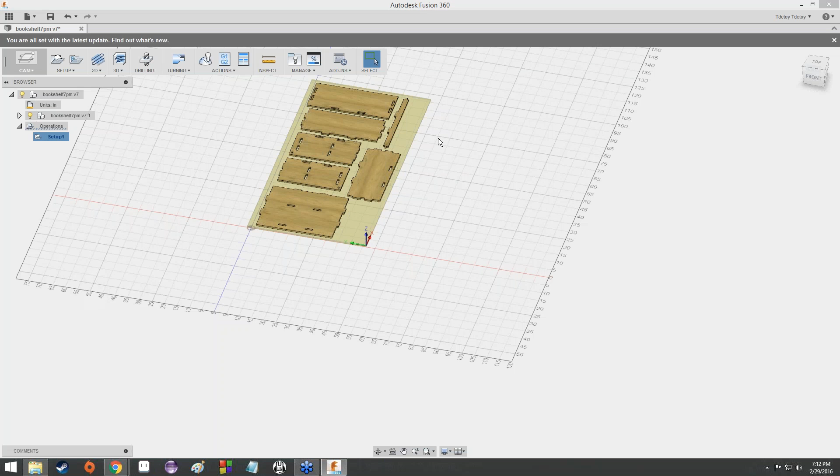Oh, it'd probably help if I didn't have the screen paused. I apologize. Yes. This is, yes. I am in the program. Thank you for pointing that out, Aiden. I apologize, everybody.

So, to recap, this is our setup, 48 by 96, thickness of ply. And you can switch modes by this upper left-hand menu right here from model to CAM. A setup is necessary, again, to simulate the conditions under which the CNC machine will be working. You can actually create G-code, that is to say the instructions for the machine to cut things out, with each individual setup. So you can create different setups for different tools under the same machine.

So you can run a setup program, then the machine will finish, you switch out the cutter on it, and then you run the next setup program. And maybe you run 2 or 3, and then you have your final product. This one's only going to be 1. It's going to be nice and straightforward and easy because we're going to be using the same cutter and the same feed rate and RPM and all that good stuff. So that's all going to be standard across the board here. So we can keep this all within the same setup.

Excuse me. I apologize. I had to drink some water and have a coughing fit. The advantages of being sick. Anyway,

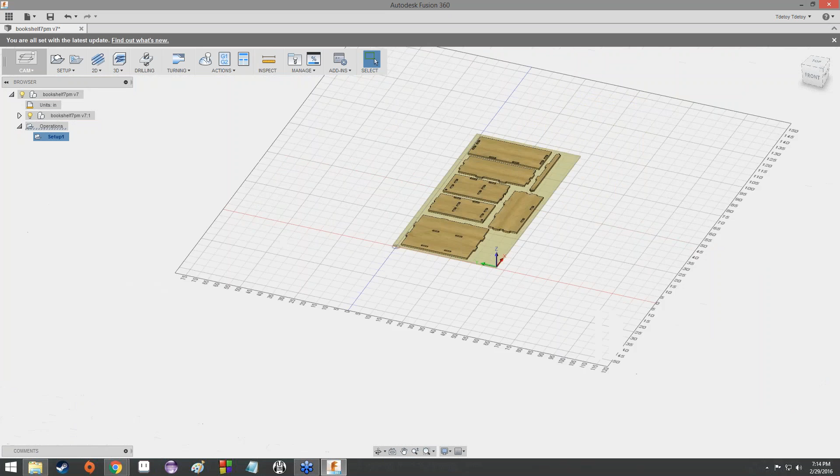Yes, like I said, we had our axis down here, Y along the 48 side, X along the 96 side, and Z pointing straight up. And it was down here in, I guess, the lower right-hand corner, depending upon your perspective. Anyway, that corner over there. Along the x-axis. As you can see, here's the x-axis, there's the origin.

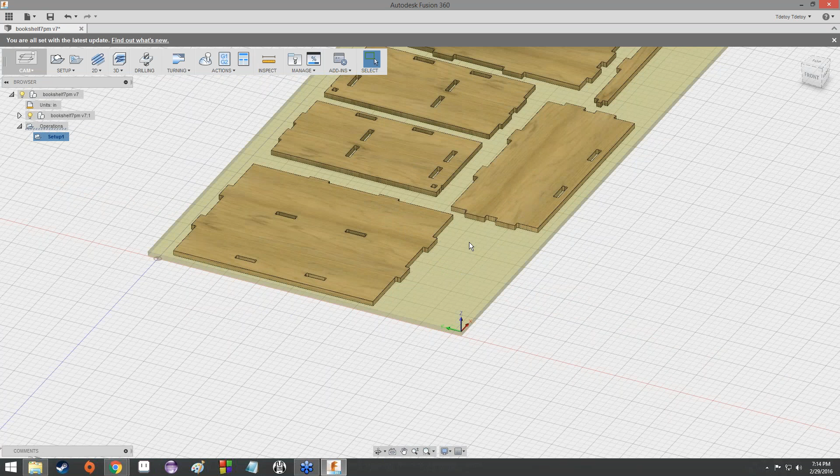So, now that we've created that setup, we're going to go ahead and start making our first cuts. There are going to be 3 sets of cuts for this particular design, and that's it. So we're going to do 3 different cut commands, all with more or less the same options, and then it will be ready to go.

So the first thing we're going to do is we're going to go up here to 2D, click the little drop-down menu, and we're going to go to 2D Pocket. If you mouse over it, it's got this weird kind of doodad that's got all the blue lines and the green lines and the yellow lines in it. Go ahead and click that one.

So this is the first thing you're going to see anytime you go into a cut menu. It's going to be the Tool tab. Now the Tool tab is where you, as one might assume, select a tool, as well as the parameters that the tool is going to be working on. So we're going to select, actually it's up here, perfect.

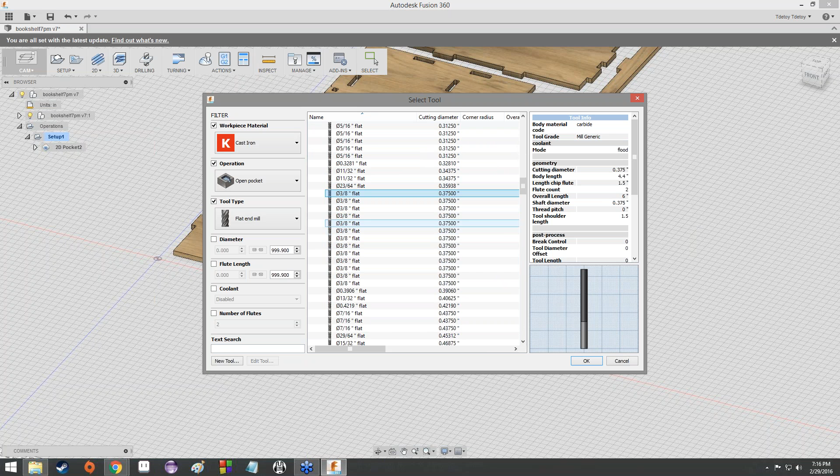For you guys at home, maybe you have one up here that's a 3/8 inch tool. Maybe you don't. If you don't, that's fine. You can just scroll down and find a 3/8 inch tool. You'll notice that there are a whole bunch of different options for a 3/8 inch. The one I selected, well, why don't I go up and look at that one? About 1/3 of it was the light gray and 2/3 of it was the dark gray.

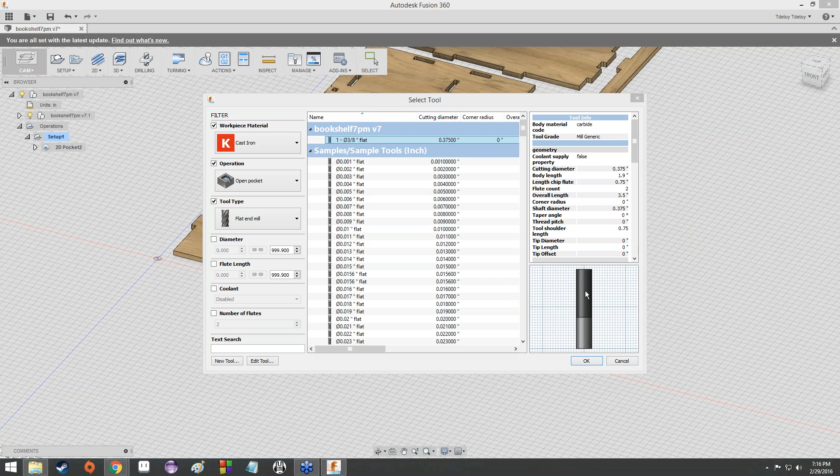They all really essentially have identical properties. I apologize for clearing my throat on a hot mic. But just for consistency's sake, if you can find one that looks like this one, select that one, and then we'll continue with that one. And just raise your hand once you've got that tool selected, because there's a lot of sifting through the tool parts list in order to find the proper one.

Okay, we got a couple of hands up. We had 4 hands. Now we have 3. Now we have 4. We did have 5. Okay, cool. That's more or less everybody.

All right. So now that we've got that selected, we've got the tool. It's the number 1 3/8 inch diameter flat. That's what that circle with the cross through means. It means diameter. Real straightforward. It's just a shorthand for it. Now we're gonna change a couple of the parameters here. So under spindle speed, notice it's 3,676.02 revolutions per minute. We're going to change that to a nice round 10,500.

It should automatically change the ramp spindle speed, which is perfect. And the surface speed will automatically update, as well as the feed per tooth and the feed per revolution. All that stuff will automatically update. We're going to change a few more things, though. Cutting feed rate, just go ahead and type in 60. It will automatically update to inches per minute, which is perfect, exactly what we want.

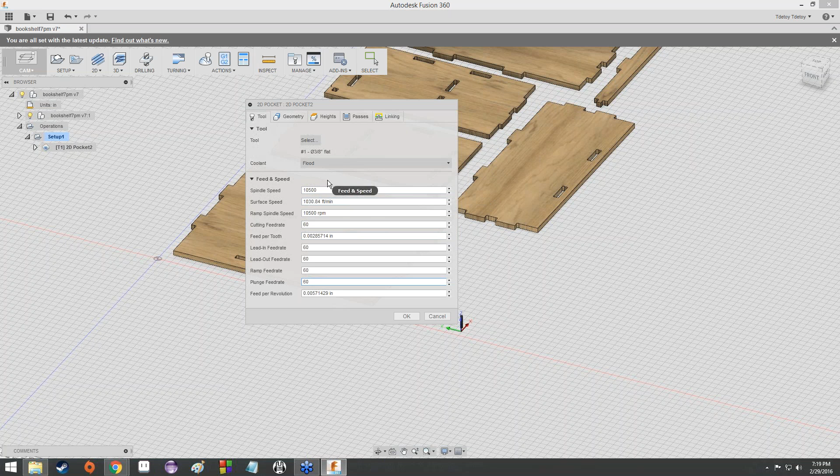But once you've got that done, if Fusion is working properly, that will be the last time you'll have to do that for basically the rest of this model. It will automatically set these options to these values and set the tool to the one that we picked every time we do a new set of cuts on this.

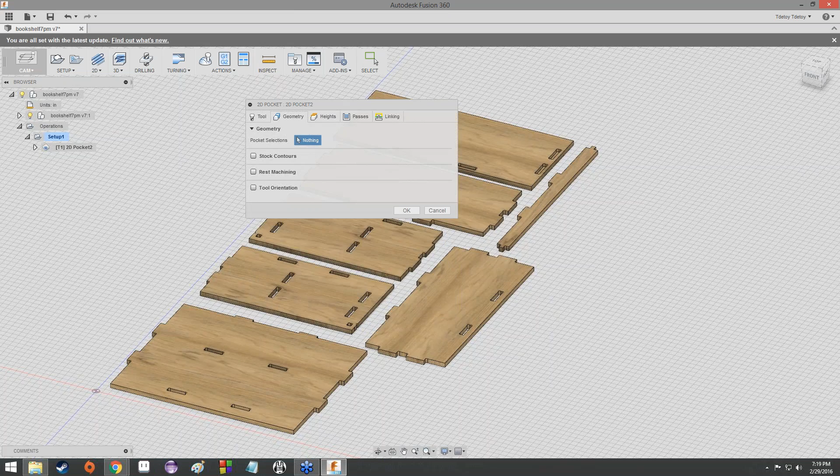So with tool done, at the tabs along the top, we're going to go ahead and select geometry. Now, geometry is just a really fancy way of saying what stuff you want to cut. I mean, really. So when we're talking about pocket selections and all that stuff, it just means what holes are you going to cut? In this case, we are going to cut all of these blind tabs along the top.

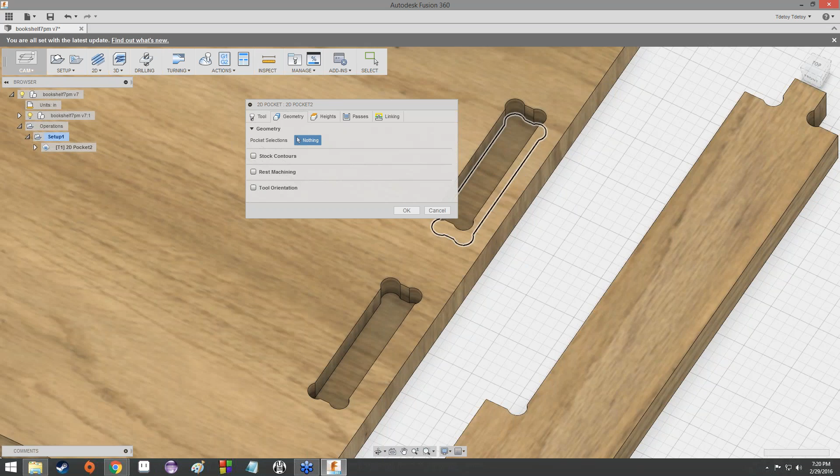And the way that's done is you would think you would just click on this bottom part and it would figure itself out. But for accuracy's sake, we're actually going to select the edge where the wall meets the bottom of the blind tab, or top, depending on what your perspective is. So, this lower dog bone here, go ahead and click that. It will think about things. And you notice how mine turned, like the entire thing turned blue. Not okay.

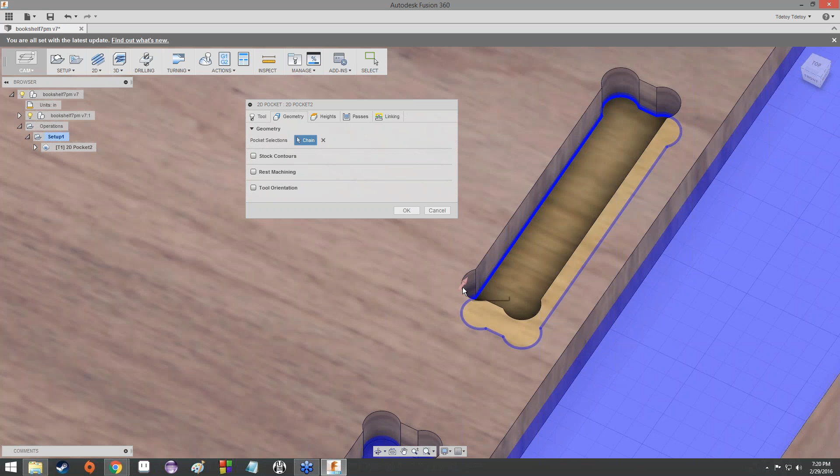Ideally, just the inside should be blue. So if the inside of yours is blue, fantastic. If it's not, you'll notice that there's this little red arrow right here, and it's on the outside of this dog bone contour. Just go ahead and click it, and it will flip around. So now it's on the inside, and just this inside area is blue. And that means that we've properly selected the inside of this pocket to be cut.

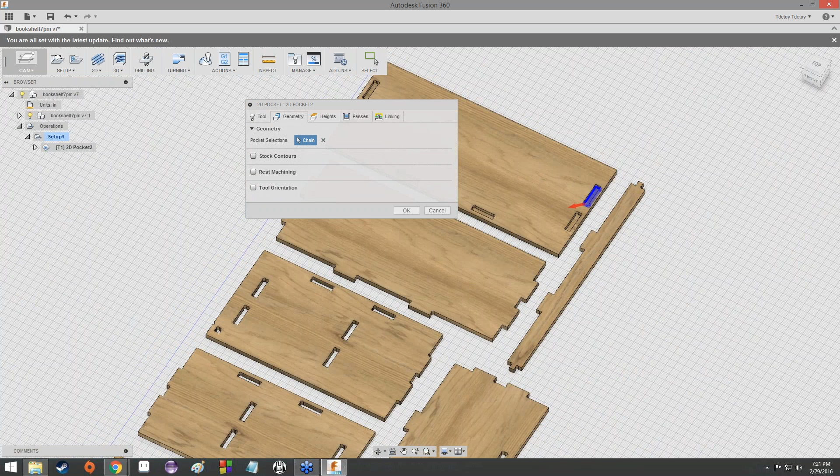Otherwise, it would cut everything around this dog bone right here. So the CNC machine would get started, and it would just cut everything over here and over here and over here, and you'd be left with a nice little dog bone shaped piece of wood. It's like those cartoons where they cut down an entire tree and then the whole thing gets whittled down to a single pencil. Or if you're thinking of The Simpsons, a single bowling pin. It's a bit wasteful, and that's not what we're looking to do.

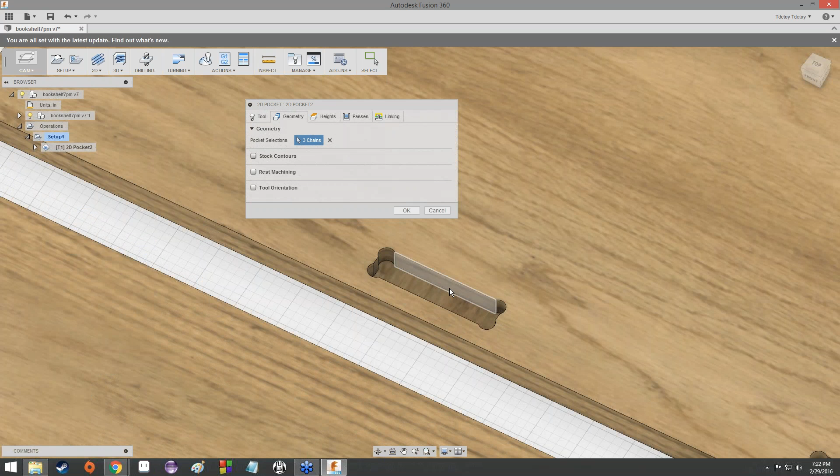So let's go ahead and do that with all of these. So again, you want to select the contour. And again, if it's selecting everything as blue, click the arrow, flip it to the inside. Contour. Sometimes it will automatically select the right thing. That's great. It just means you got lucky because it guesses, 50-50 chance. It guesses under the guise of being a smart interpretation, but just from my experience, it just randomly guesses the inside or the outside. So make sure to specify very explicitly that you just want these blind tabs cut out.

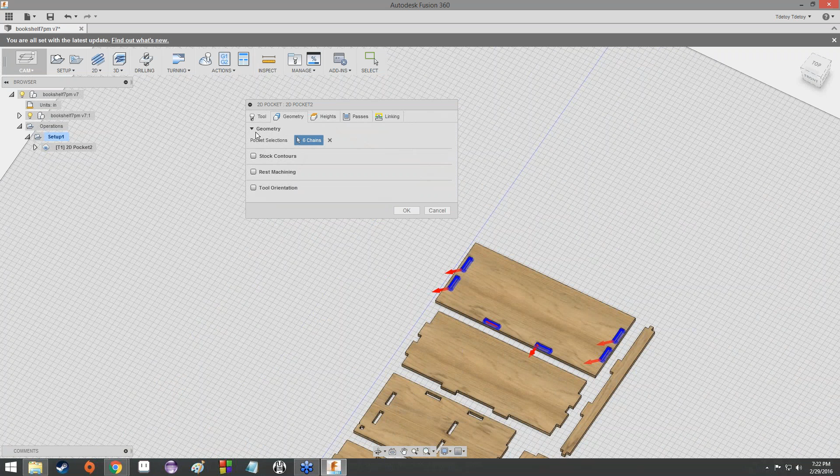So that's our geometry. Perfect. Heights is the next tab. We're going to leave that one alone. Pretty much never going to touch heights, at least not in this class. It's not going to be that often that you're going to touch heights in CNC machining in the future. I could be wrong, in which case I'm going to eat my words, but the number for the cutting feed rate is 60 inches per minute. You can just type in 60, and it will figure itself out.

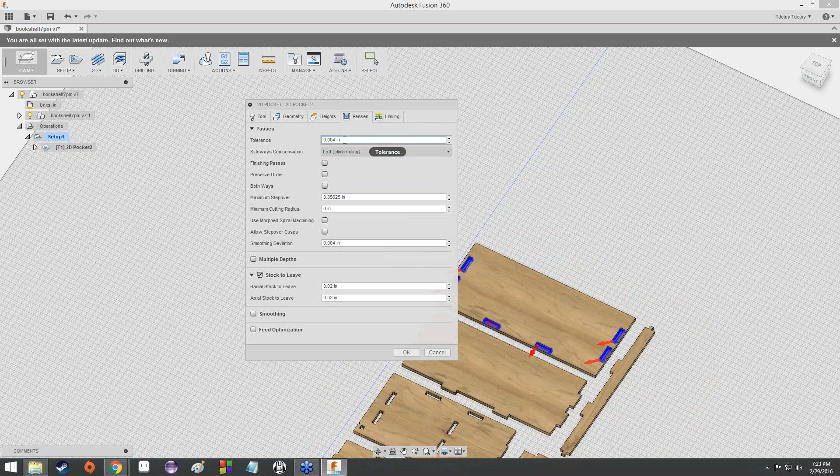No problem. Okay, so onto passes. Now passes is where we're going to start messing around with stuff again. Tolerance we're going to keep the same. Basically it just means how much error we can have in the cutting. Actually, here's a pretty good explanation right here. So if you're cutting something that's got an unusual curvature on it, like an ellipse or a spline. A spline is just basically a fancy name for a curved line.

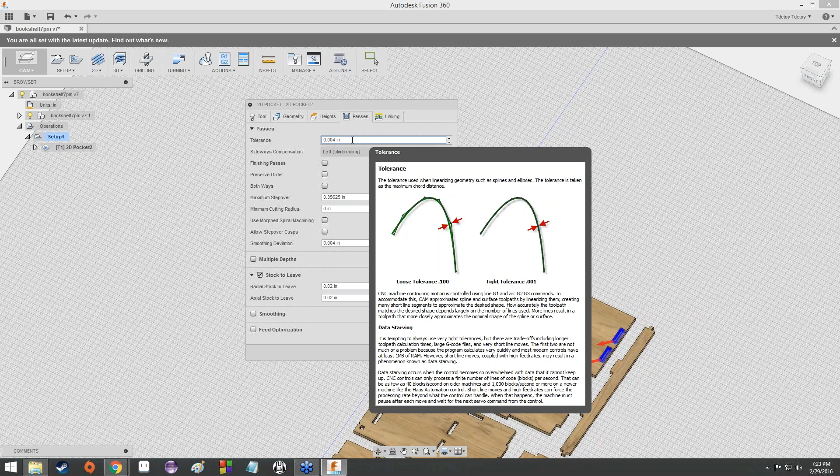If you have a very low tolerance, let's look top down at this dog bone. So these curves at the edges here. If we had a fairly low tolerance, we might see something like this straight line right here. Imagine that I can draw straight lines. Would look fine. And then you'd have a straight line that goes out to here, and then another straight line, and then another straight line, and so on and so forth. So it would look more like some sort of, I don't know, dodecahedron or something like that, rather than an actual circular piece of wood.

A very high tolerance means that it's going to be closer to an actual natural curved shape. So it's going to look closer to the model that you created. If you're not worried about accuracy, like if it doesn't have to be a curved line, then you can go with a pretty low tolerance. Why did it go back to heights? Okay, there we go. If you need accuracy, if you're not concerned about how long it's going to take to cut, then you go with a very high tolerance to ensure that you have as close to the model as possible.

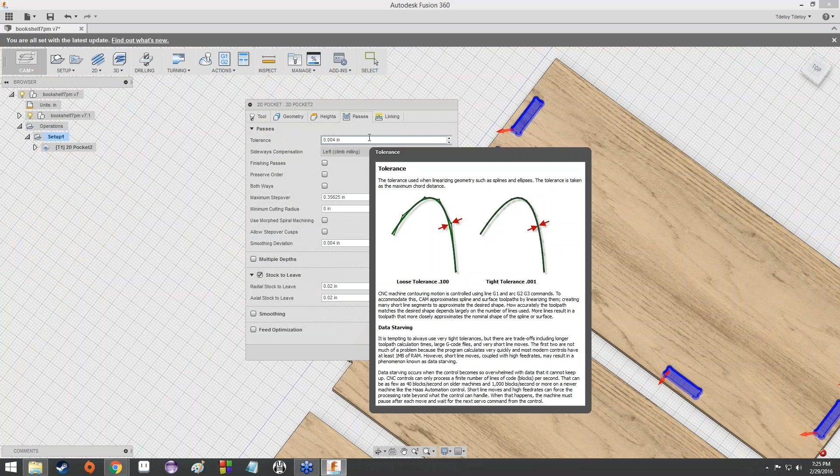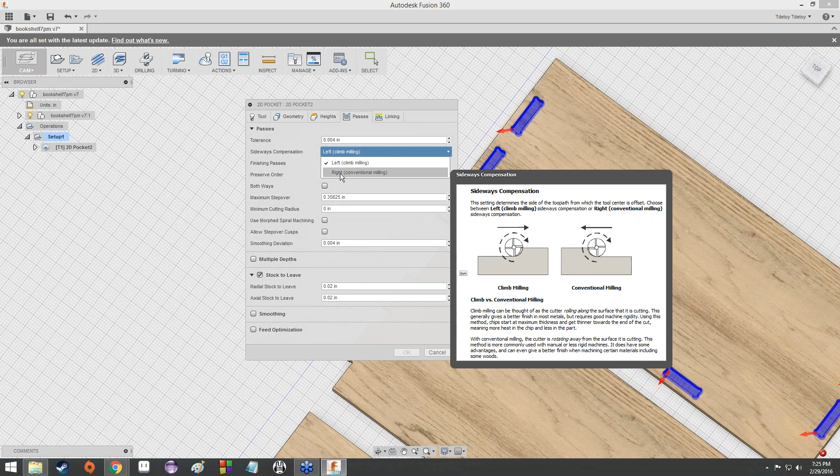Sideways compensation. Sideways compensation just refers to the direction that the mill moves. It's always going to spin the same speed, but it refers to the direction that the mill moves relative to its spinning. For these cuts here in this model, we're going to use conventional milling. So for each of our 3 cuts, it's going to be conventional milling.

Finishing passes preserve order both ways. Maximums, like the rest of the stuff in passes, you can just leave as is. So we can minimize it right now. Perfect.

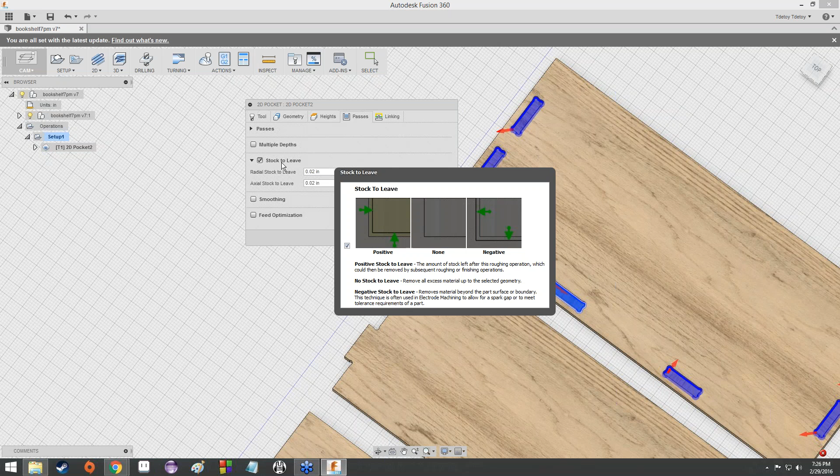Normally if you're cutting like a 3-dimensional design or something that is different from this, sometimes you might want to leave some stock behind. Basically, ensure that there's going to be a little bit left over in case something goes wrong. Or you can cut away a little bit further just to ensure that the design you're cutting is large enough. We're not going to leave any stock behind, so just go ahead and uncheck that.

However, we are going to check multiple depths. Now, multiple depths basically means the tool is going to take multiple passes at our cuts. So let's say it's cutting this pocket. It's going to go in once, a certain depth down, and then attack it again a little bit deeper, and then again a little bit deeper, and so on and so forth. Sort of cutting it away in degrees, as opposed to going as far down as it needs to, and then just throwing all the material out of there.

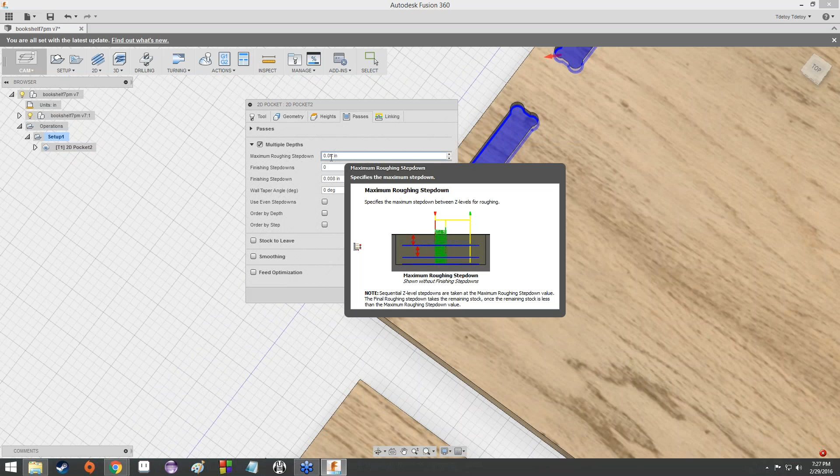Multiple depths kind of helps with keeping the material from breaking as much. It's easier on the tool, stuff like that. So we're going to go ahead and change the maximum roughing step down to 0.1875 inches. The relation to that is it's half the diameter of our cutting tool.

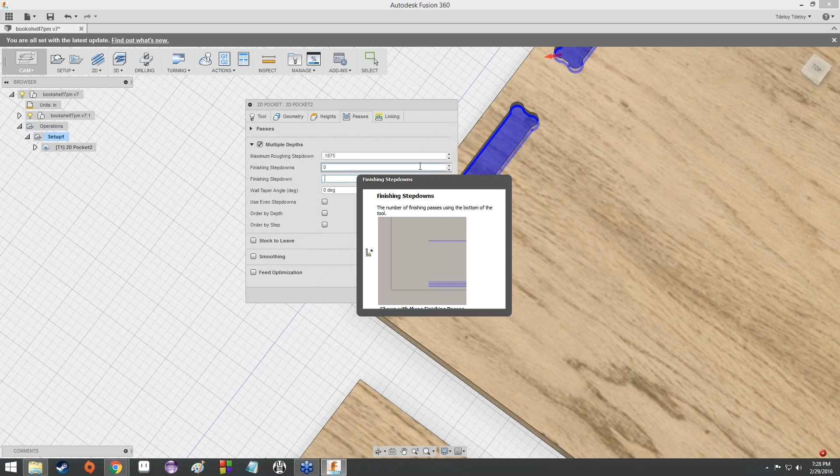But that's really it. It's not like it's gonna make a huge difference. It just gives us a nice value to step down with that's not going to be too crazy precise or anything like that. Same with the finishing step down, 0.1875. So now maximum roughing step down and finishing step down should both be set to 0.1875. When that's done, we can move on to linking.

Linking we're going to leave largely untouched except for ramp. Go ahead and expand ramp. Under ramp, you've got a whole bunch of different ramp types, and if you click this list and mouse over one of them, it's going to give you a nice little explanatory picture of each of these. The lines, by the way, are the path of the cutting material. Excuse me.

So as you can see, plunge is just going to head straight in and then start cutting. On zigzag, it's going to do a nice little cut back and forth in order to get down to the material that it's actually cutting. Profile is going to try and follow the shape of the cut once it actually gets down to the material. Smooth profile is going to be a nice little circle, and helix is more of a spring, like a spiral. Whereas smooth profile does some sort of weird wiggly stuff at the bottom. Anyway, we're going to do a plunge.

You might want to do something like helix or smooth profile on a stronger material, just to ensure that, again, you extend the life of the tool, make sure it lives as long as possible. Don't just slam it into some metal and start running it around with the metal screeching and blah, blah. It'd be terrible. With wood, though, you don't really have to worry about that so much. So you can just set it to a nice, simple plunge. It's just going to head straight down in there, cut around, done.

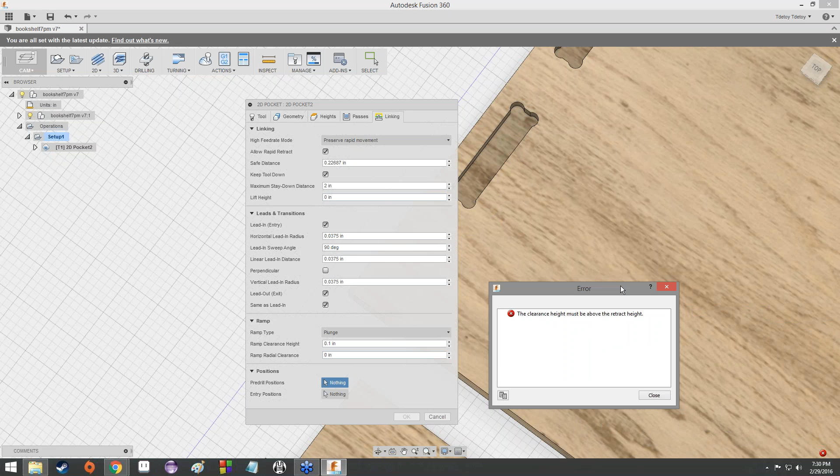And we seem to be having an issue. Clearance height must be above the retract height. Okay, probably was just me when I was trying to figure out what was going on and it was clicking around. All right.

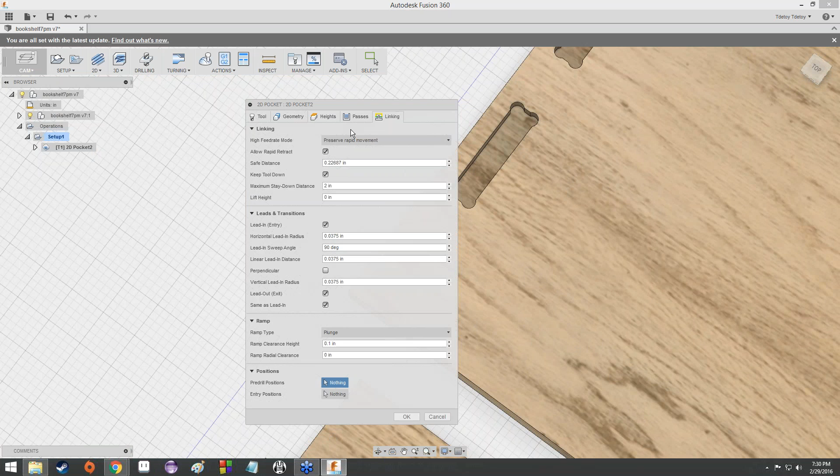So we'll hit OK. And if we look over on the tool after it's done thinking, you've got this nice little set of lines here and this weird cylinder hanging out here. Yeah, I zoomed in way too far. There we go. This weird little cylinder hanging out here represents the cutting tool, and the lines represent the path that the cutting tool is going to make.

So as you can see, it makes a few passes inside of this hole, and then moves on to the next one, does the same thing, makes a few passes, and then moves on to the next one, and so on and so forth until we hit all 6 of them. Yeah, 6 of them. So that's one thing down.

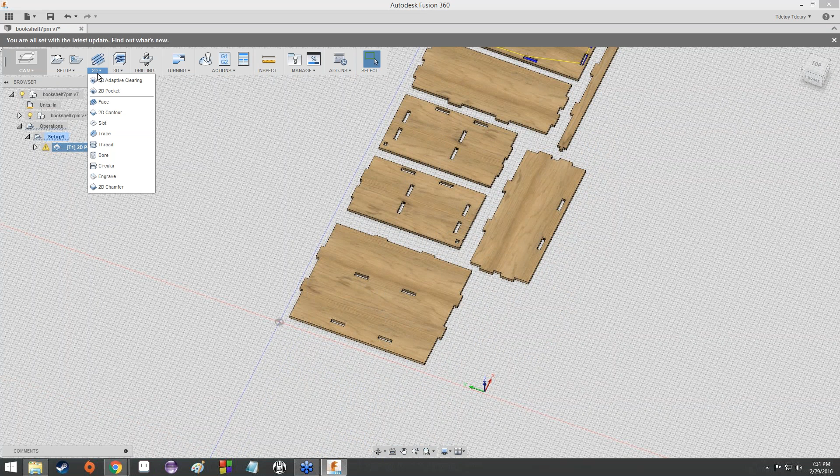Next, we're going to set up a cut so that all of the holes are cut out in all of these different shelves and walls. So let's go ahead and do that too. This one, however, click the 2D list, drop down. This one's going to be a 2D contour. Now, a 2D contour is great if you're trying to cut out some material from a stock that's the same thickness as the stock. You're not trying to leave any walls behind, stuff like that.

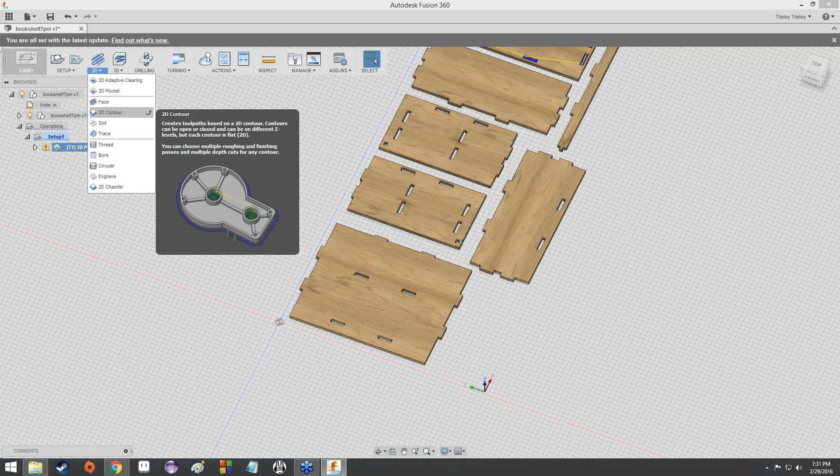Which is perfect for these holes, because all we're doing is just cutting holes straight out of the material and not really worrying about leaving any behind. So I'll go ahead and click on that. As you can see, under the tool it brings up the tool that we're using, as well as all of our parameters. Fantastic.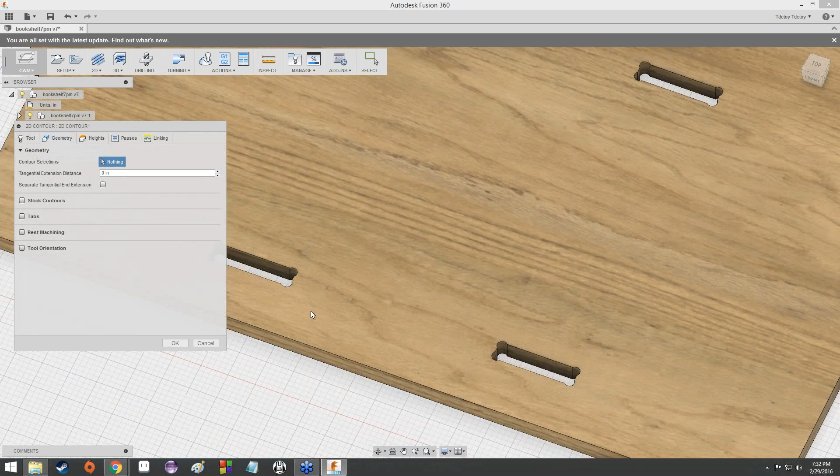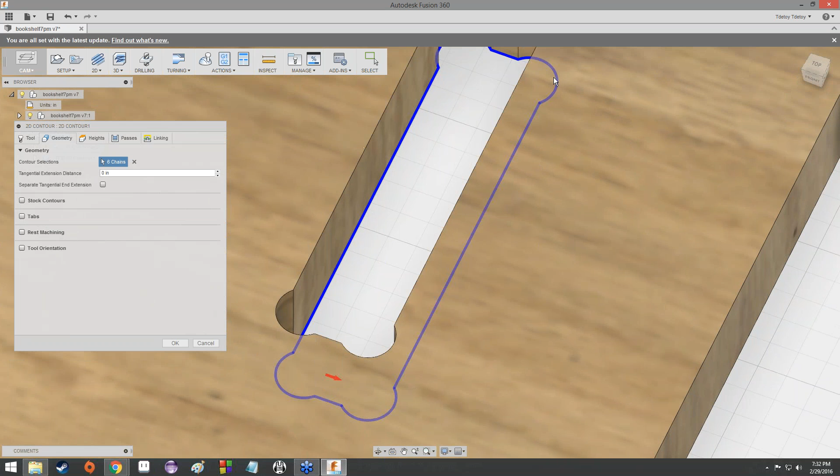Now geometry is going to take a little bit longer. For geometry, we need to select every single hole that exists in this bookshelf, except for the blind tabs, because we already did those with the 2D pocket. So let me start with this back wall. I'm going to click again at the bottom here. Notice how the arrow's inside. We want that to be inside. That's perfect. This one can be a little bit more difficult to tell because it's not necessarily going to be glaringly blue, if I remember correctly. I could be wrong, though. At any rate, if the arrow is not inside of the contour here, then go ahead and click it so it is.

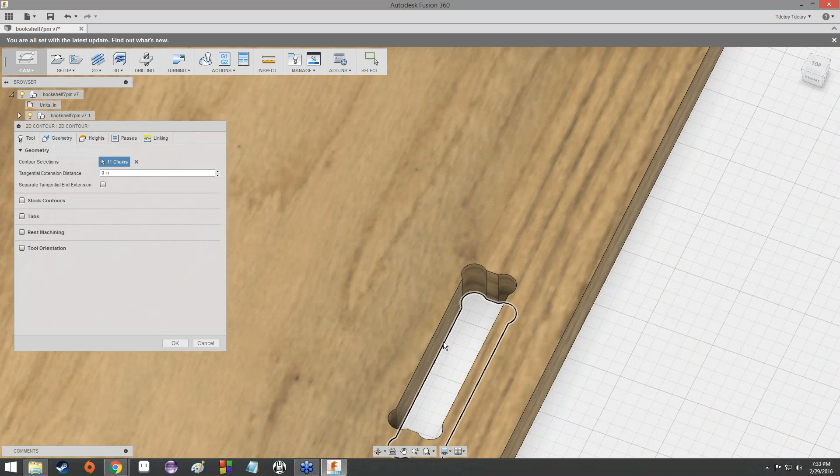This one seems a little bit better at properly guessing the correct direction. So maybe I was wrong. Maybe it does have some sort of intelligence. Nope. There we go, on the outside. As you can see, this one's a little bit more difficult to tell because the rest of it doesn't turn blue. The only way I know is that the arrow is sitting on the outside of the shape. So I'll go ahead and click it. It's on the inside again.

Don't worry that it's pointing towards the line or pointing outside. It might be a little bit hard to tell if you zoom out, because it keeps the arrows the same size, so it looks like it's outside. So if you're not sure, zoom in until the shape is much larger than the arrow so that you can get a good feel for what side the arrow is on. Click.

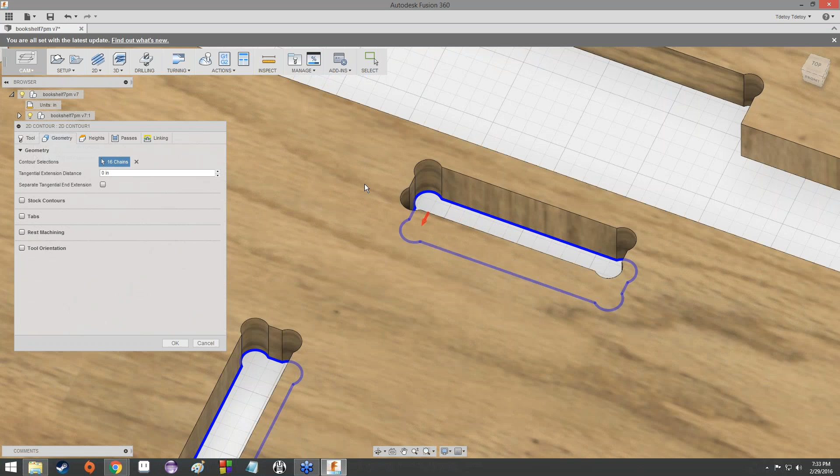And that's fine. And that's fine. That one's fine. That one's fine. It's a fun game. Let's see how many times I say that one's fine before we're done. Ha! This is all ready to go as far as geometry is concerned.

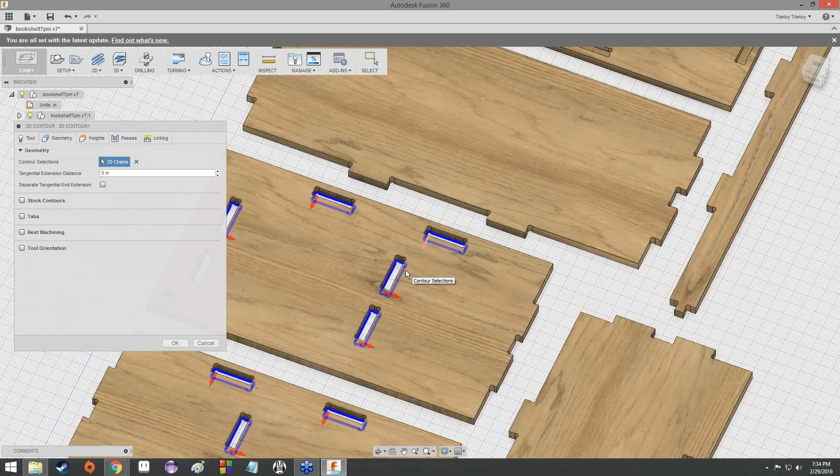Perfect. Under heights, we're going to leave that untouched again. Under passes, we're going to do multiple depths one more time. Also, make sure your sideways compensation under passes is conventional milling, because that's really important. Now, maximum roughing step down, once again, 0.1875. And finishing step down, 0.1875. It's not a scientifically proven amount or anything like that. It's just a nice number that works. So that's what we're working with for the step downs, half of the diameter of the tool, to reiterate.

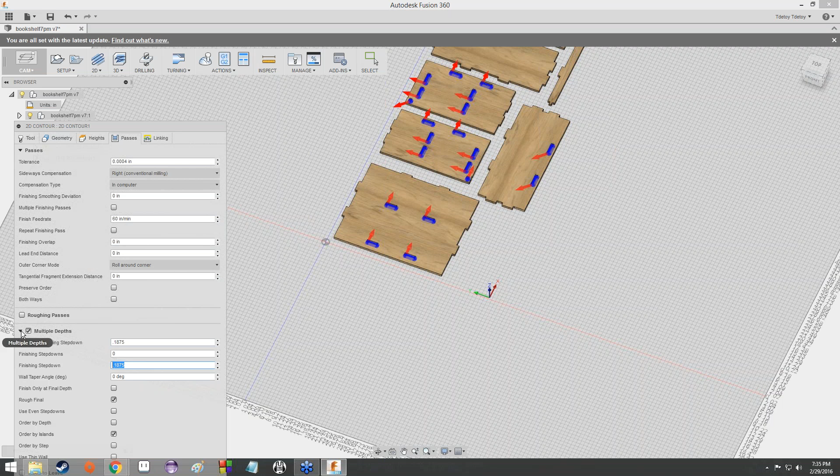So perfect. We've got multiple depths selected, we've got conventional milling, and we've got the proper step down values for these multiple depths. Under linking, we don't really have to do anything because we don't have to ramp. That doesn't even matter. We're just cutting these holes. Don't even sweat it. In fact, if we really wanted to, we could do a 2D pocket of this as well. Because really, a contour is just meant to go along the edges, and it doesn't worry about the stuff in the middle.

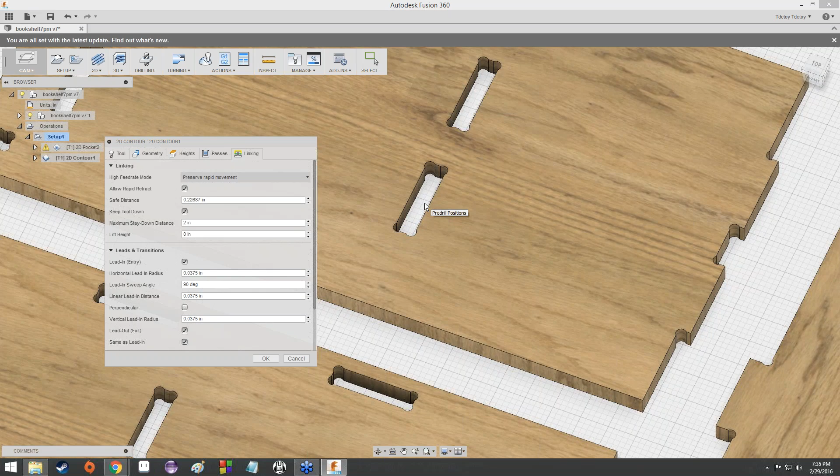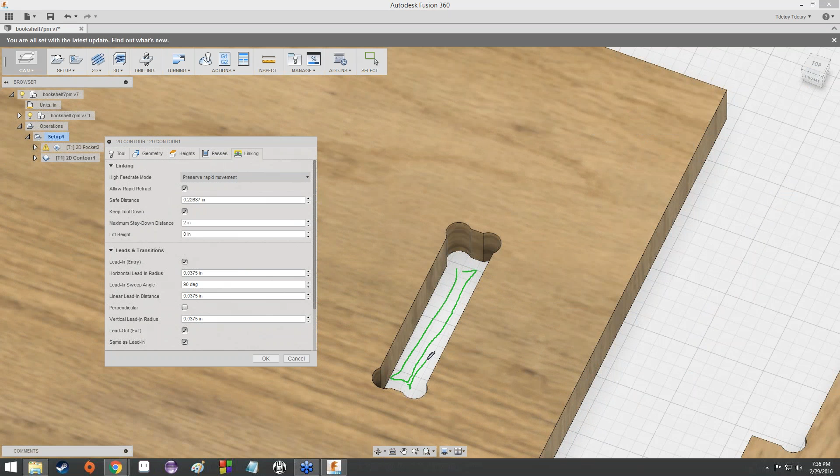So if these were larger, basically there would be a piece of stock in the middle which wasn't connected to the rest of the material. In some cases, that may be an issue. In our case, that's fine. We want these to be empty anyway. So even if there's a teensy bit of stock left over in the middle, just a little tiny bit left over because the cutter couldn't reach it exactly, that's fine. It'll fall out. We'll have our nice hole.

So that's it for the 2D contour on the holes. And as you can see, once it's done thinking about it, it will render the tool path that it's created, which is this incredibly wiggly roundabout path. I don't know why it's doing that, but I'm not a computer, so who am I to judge? It's going to start in the middle here, go up, double back along here, double back again, go a long way around here, and then all the way down here. It doesn't make any sense to me. I don't question it, though, because I don't have to cut it myself.

So we've done that now. We've done the cut for this, and we've done the cuts for the blind tabs. Perfect.

Now what do we have to do? What do you guys think? I guess I've said it several times, so it shouldn't really be a surprise to anyone, but just keeping you on your toes. What do we have next?

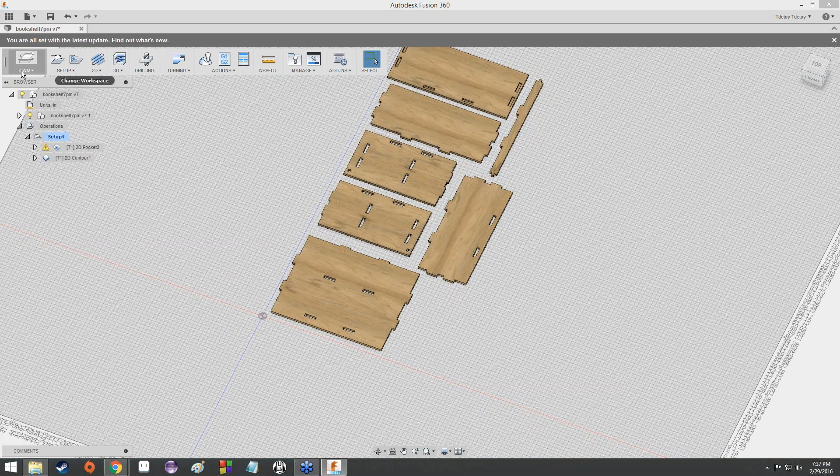I'll give you a hint. What's wrong with that picture? Okay, no takers. All right, well, we have to cut it out from the stock, right? We've cut out the holes, but we haven't actually separated the parts of the bookcase from the stock. So that's going to be another contour cut.

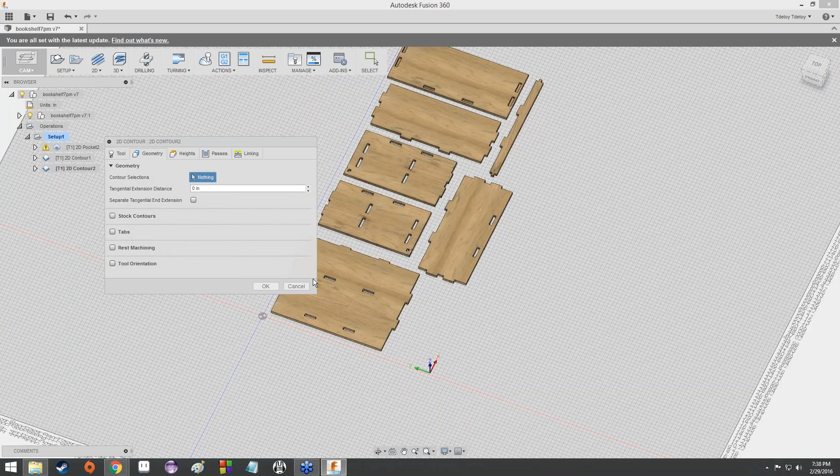Let's go up to 2D and then 2D contour. Tool selections kept the same. Now under geometry, we're going to select the bottom of all of these. Again, it's going to be a little bit trickier to tell, but you want to make sure that the arrow is on the outside. Look at that, arrow on the outside. This time we want the arrow on the outside, not the inside, because otherwise it's going to cut them and make them a little bit smaller than normal, and nothing's going to fit very well.

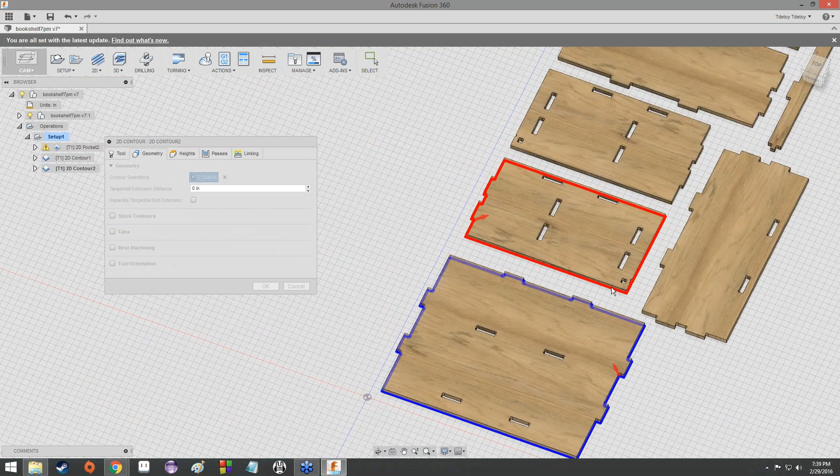Where's the arrow on this one? There's the arrow on this one, and that arrow is on the outside. And this arrow is on the inside, so let's swap it. There we go, now it's on the outside. This arrow is on the outside. And this arrow is on the outside.

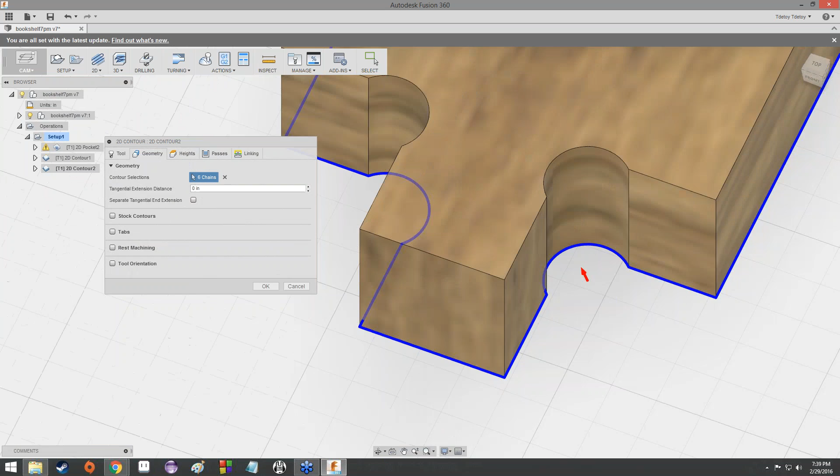I bet that never gets tiring to hear, huh? And then this arrow is also on the outside. What a surprise. And what about this arrow? This one's on the inside, so we click it, flip it to the outside. Whew, that was exciting. Nothing quite like selecting things to cut.

Now, let's not move on quite yet. There's one more thing we're going to do in this area. When the parts of the bookcase are going to be cut out of stock, we're going to run into a little bit of an issue potentially, when they're fully cut out, in that they are now completely loose and not a part of the CNC machine anymore.

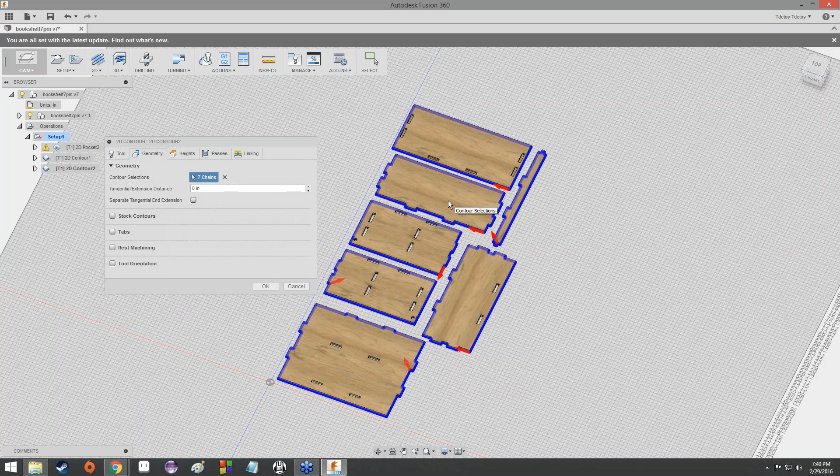This can, they can move around from the CNC machine operating. If you're particularly unlucky, and these pieces are small enough, they could go flying off after you're done cutting it out. Like once it hits the last little bit and the thing's still spinning, it's going to pop up and pull up the little thing you just cut out with it. And because it's spinning, it's going to fling it off somewhere into a garage wall or something. Worst case scenario. But regardless, we want to make sure that these are a little bit more anchored to the stock that we're cutting it out of.

We'll basically have it do most of the work, and then it'll leave us to do some really simple cutting at the very end there. So to that end, we are going to create some tabs. That's all, nothing crazy. So go ahead and click that checkbox.

Now, tabs, what they're going to do is they're going to leave a little bit of material behind, again, so that it's still technically attached to the stock, and then it's simply a matter of just kind of punching them out on your end. Under tab shape, you have two options: rectangular or triangular. We're going to make some triangular tabs because we like to live life on the edge. Things are crazy.

Tab width, the tab width is going to be 0.375 inches, should be fine. The tab height, we're going to have the height be a little bit smaller than each pass made by the CNC machine. Yeah, so this is going to be 0.185. I put in 2 points there. Yeah, 0.185 inches, that's going to be the tab height.

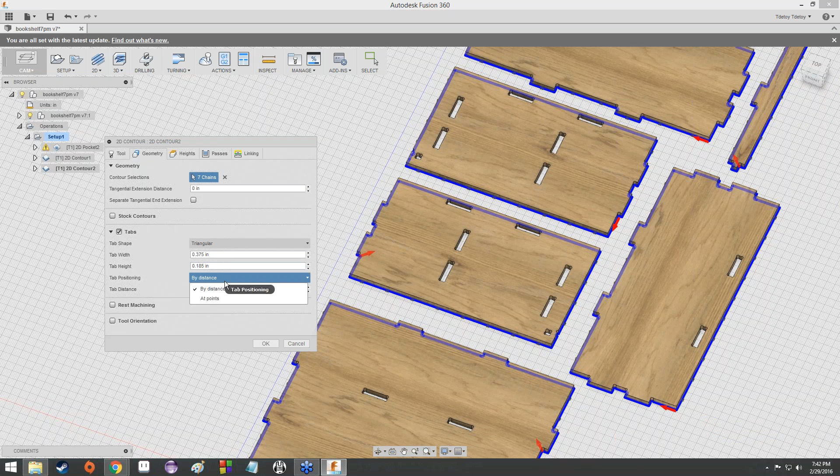Tab positioning, by distance, again, Fusion 360 is going to do its best to determine where the tab should go, and it's going to place them roughly 3 inches apart. Let's not do that, that's going to be way too many tabs. Let's go at points.

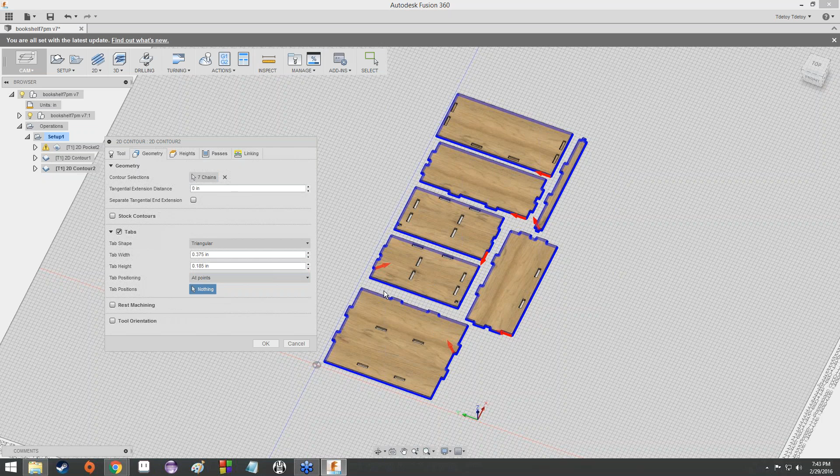At points allows us to manually select where these tabs are going to go, and that's going to make our lives easier, both in the amount of time it saves in cutting and also in knocking the pieces out of the stock, because there are going to be fewer tabs keeping it in place.

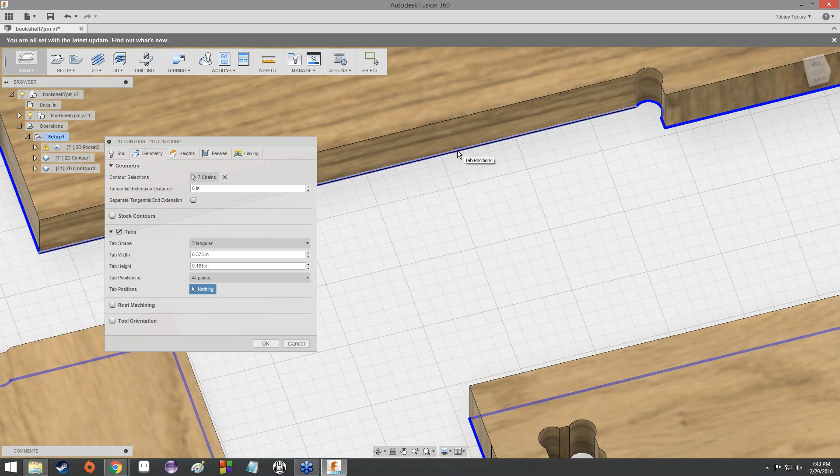This one's really simple. You'll notice tab positioning is selected at points, and if I mouse over bits of it, I get this blue X. It might be difficult to see, but if you're doing this along at home, you should see the blue X if you mouse over one part of the bottom edge.

I'm just going to place a couple near the edges here. As you can see, there's really no scientific measurement going on, I'm just clicking the edges. Ideally I probably should have had a reasonable sort of symmetry between the two, so I'm going to try and do that by eyeballing it. Good enough. And then we're going to do two more on the other side.

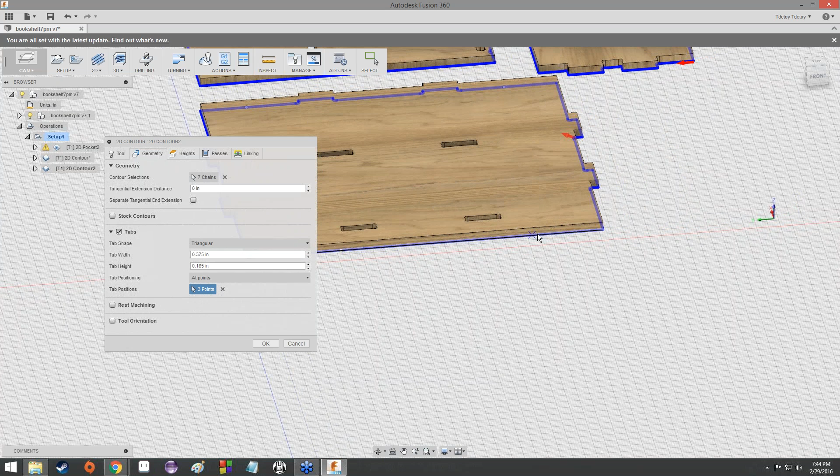Again, sort of a reasonable symmetry, and that's more or less good enough for that particular part. As you can see, we've got 4 tabs, roughly the same distance from the center. Not so down here, but relative to each other, yeah, sure.

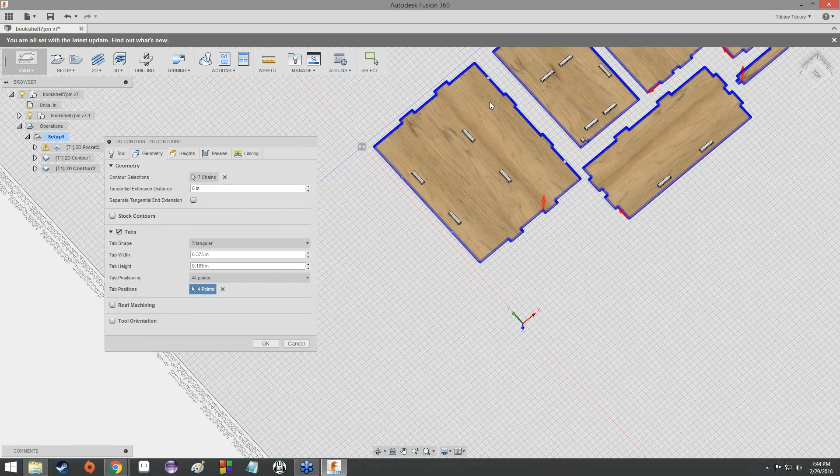Anyway, we'll go ahead and do that with all of these, just add 4 tabs to each one so that we've got a little bit more stability on our project. I'm not even really worrying about it too much. There and there, there and there. Flip it around. There and there. There and there, and there. Just adding tabs all willy-nilly.

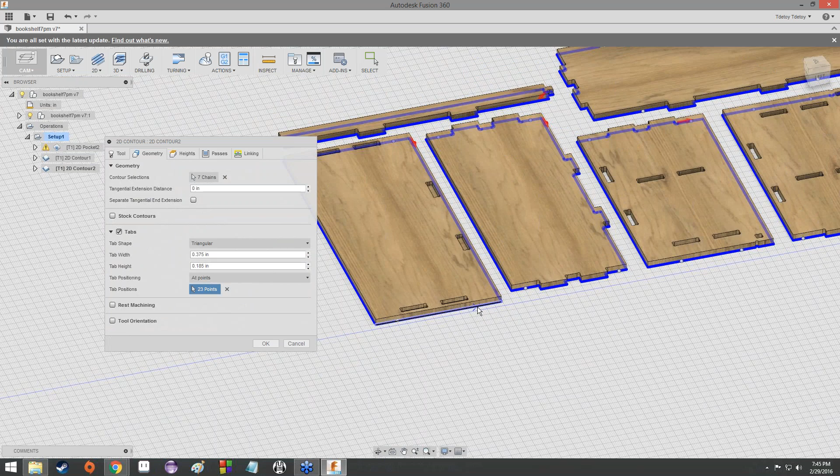And with that, that gives us 4 tabs on each part for a total of 28 points. So I've got 4 tabs on the back, 4 tabs on the left and right hand sides respectively, 4 tabs on the bottom shelf, 4 tabs on the top shelf, 4 tabs on the top of the bookcase, and 4 tabs on the kick plate. And if we zoom in, you can tell because there are these little white dots on each of them.

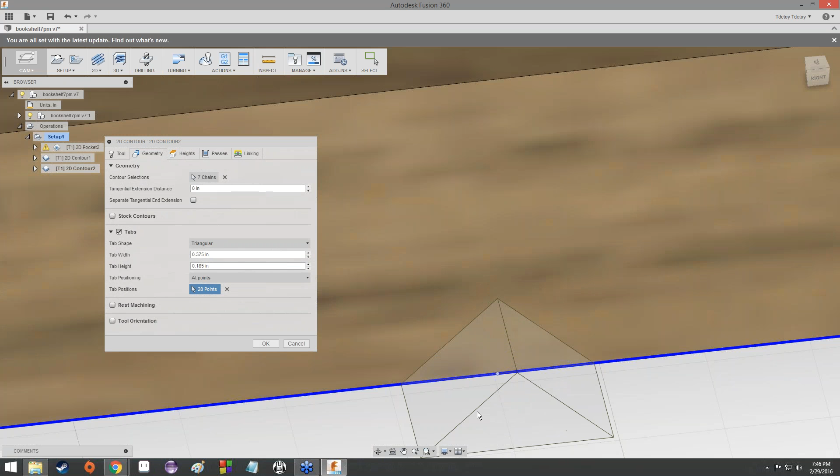If you zoom in far enough, you can see there's this little triangular prism there, not quite a pyramid. That's great. That's the tab that we're going to be cutting out of the material.

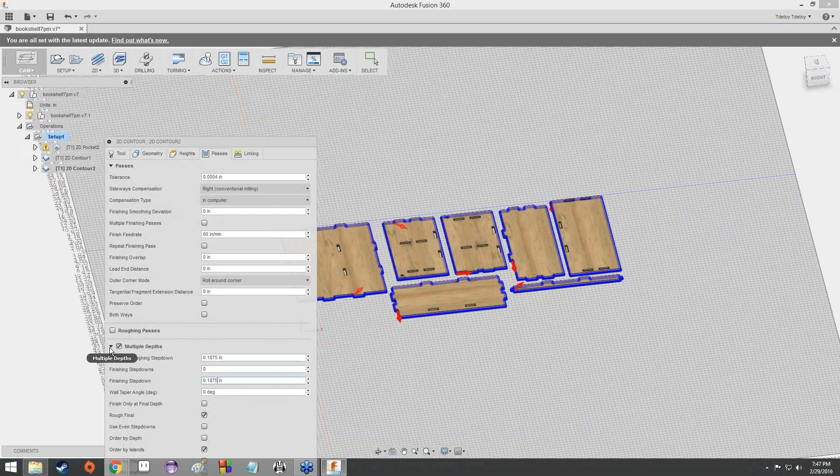Under heights, again, keep everything as is. Under passes, make sure it's conventional milling. Multiple depths, 0.1875. Perfect. And under linking, keep everything to its default. Now hit OK, and it's going to spend some more time thinking about it.

When that's done, though, we should have a toolpath. Look at that. Toolpath running around all this stuff. Oh, bam.

Now, those of you who were here on Wednesday got to see the majesty that is the simulate function, but there was one thing I didn't show you about it. And for those of you who weren't here, you didn't get to see the simulate function, so I'm going to go ahead and show it to you right now.

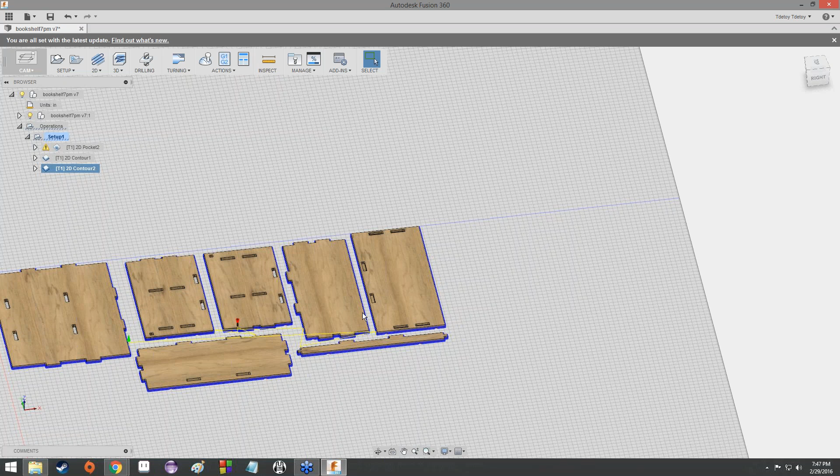So we'll go ahead and click on setup, so now the stock is showing, sort of, there's like a ghost stock. And then under actions, there is this sort of half dome with a peg on top. That is the simulate part of Fusion 360. Basically, this just gives you a computer simulation of what's going on with the toolpath.

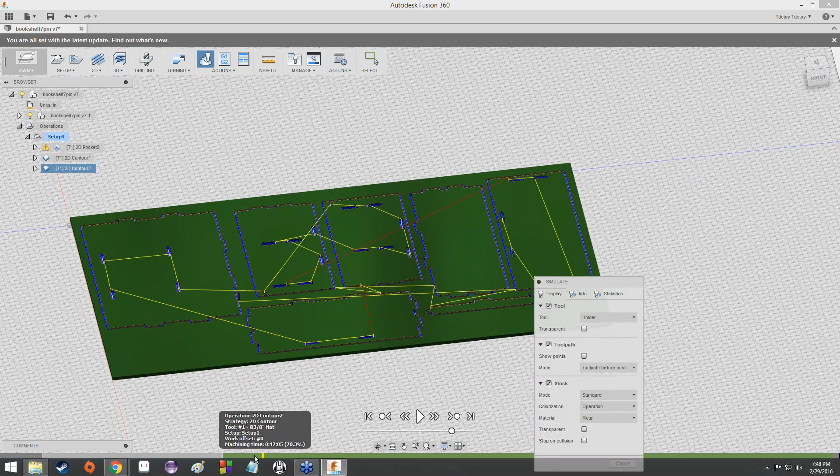Now here's the thing I didn't show you. You can click this check mark next to stock, and what it's going to do is actually show you what the whole thing is going to look like inside the stock and everything. So if we were to, it's a nice reflective metal, which reflects exactly what we're going to be cutting it out of, obviously, naturally.

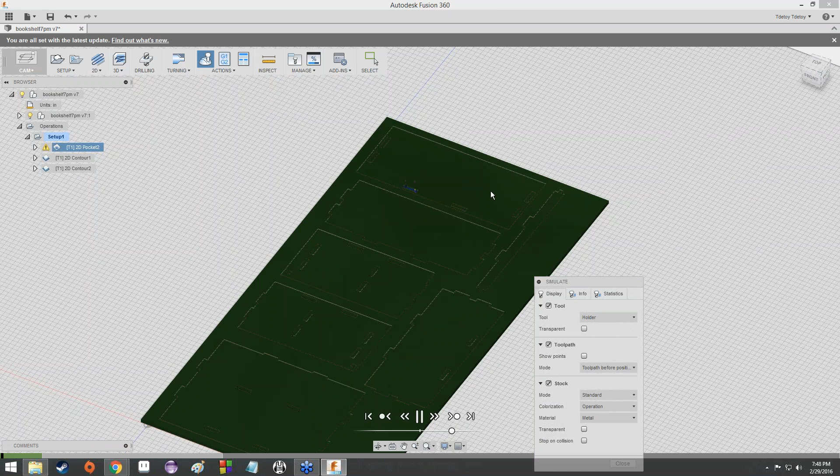And then you can just hit play, and you'll notice that the tool is running along its merry way, cutting it along in stages, going slightly deeper each time, leaving behind some material before it cuts it out, yada yada yada.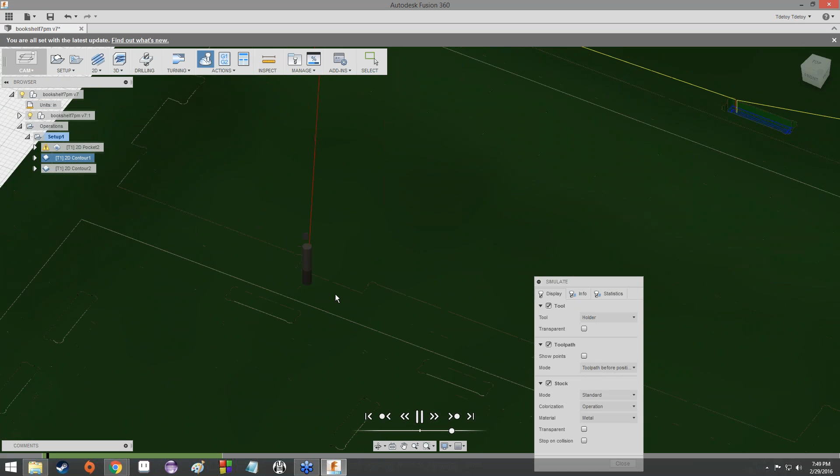But this can be very useful for seeing if you're running into an issue where the material is butting up against some other stuff, like maybe you've got a little bit more of a complex cut, and the cutter can't actually move in that direction to cut it out. It runs into some of the other stock or something like that, in which case you generally get a red line like you've got here.

This one here is just because it retracts too far upwards according to the simulation once it's done with that cut, but don't worry about it. The CNC machine is going to retract up exactly as far as it needs to when it's done with those cuts. Now it's getting to cutting the holes.

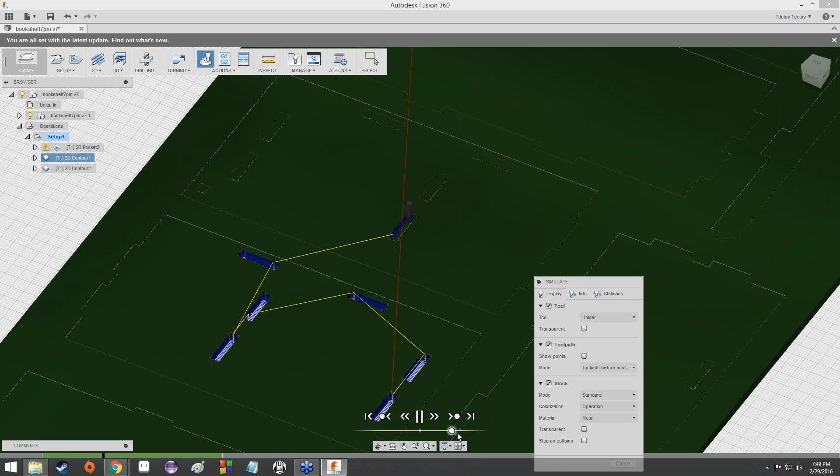We can affect the speed by dragging this little slider around, so we can make it go super fast or really super duper slow, or have it go backwards if we'd like. So we're going to have it go forwards. We're going to get to the part where it starts cutting out the different pieces, and we're going to verify that those tabs appear. Go, go, go.

So now it's starting to cut out. I guess that is the right wall. So it's going, it's going, it's going.

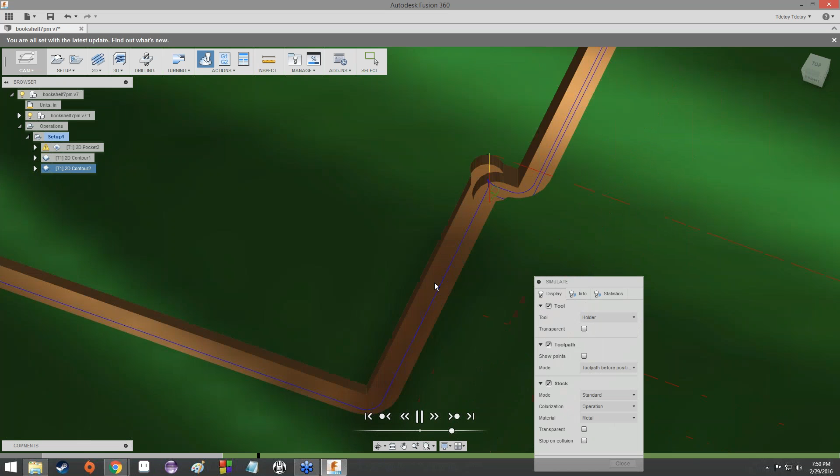What we can do is zoom way in on an area where we know there's going to be a tab. Wait for it to come back. There we go, it's making its second pass here. Cutting, cutting, cutting.

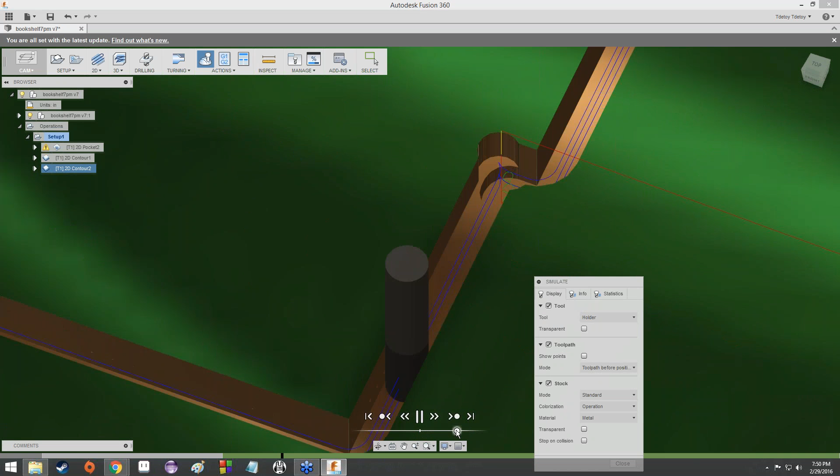We'll speed it up a little bit so it can come back. Whoa, too fast. I cannot seem to find a happy medium. There we go, yep. You'll notice right here, whoa, that reflection.

I like how there's a scaffold on this reflection. I wonder what exactly it's reflecting. Anyway, you'll notice right here that there is this sort of triangular shape. This is the beginning of our tab.

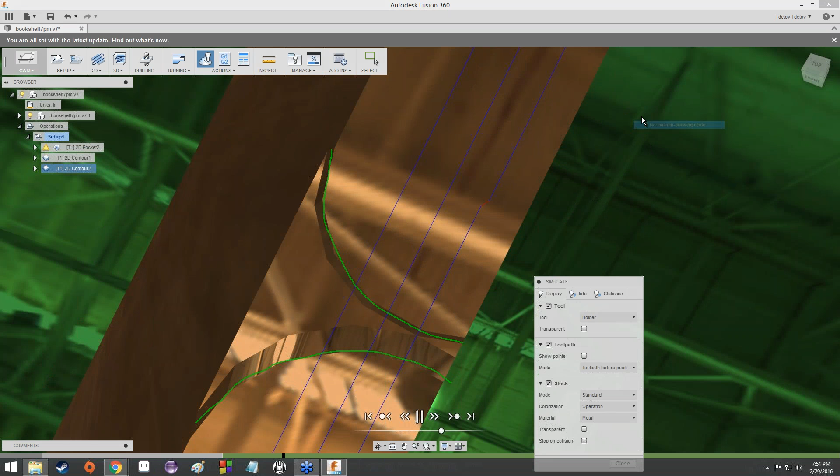So once it starts making another pass, or once it gets here from making another pass, you're going to notice that that triangular shape deepen. It's really slow, so I'm going to speed it up again a little bit. Okay, there we go. Zoom way in.

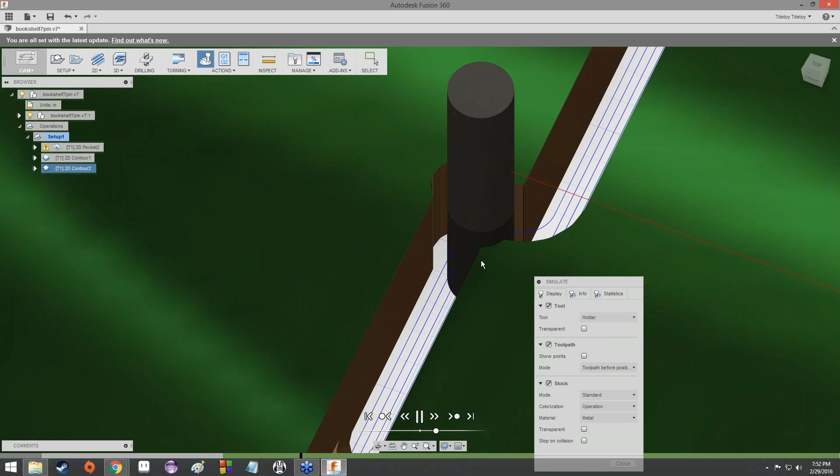I had to pick the last tab too. I mean, technically I could have moved over to any of the other ones and you could have seen it, but here it goes, and then it's going to kind of pop up a little bit for a second and then go back down, and here's our nice triangular tab. Makes it easier to cut. And then it's going to finish off the edge right there. Boom, done. Moving on to the next thing.

And if you're so inclined, you can just watch this for the entire cut.

Apologies, another coughing fit. All right, so...

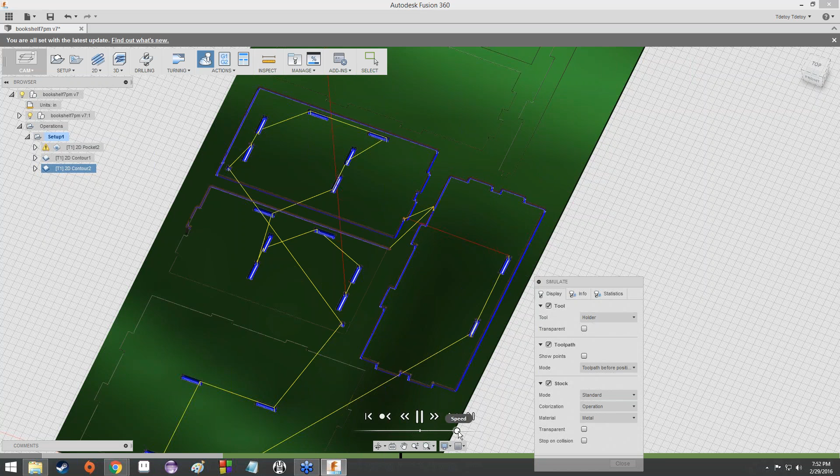Let's say that we've watched this thing do its little cutting duty and we've been impressed with it. So far, so good. Everything looks fine, it's ready to go. Well, what do we do now? Let's go ahead and close this. We're not going to simulate it anymore.

Now you'll see the second option under actions. It has a G2, G1, and a G2. Guess where the name G-code comes from? Well, it's just a bunch of different actions, a listing of commands. What we're going to do is click that one.

And yeah, we're going to reset to the basic one. So we got a whole bunch of stuff right here.

Under post configuration, go ahead and click the drop down and make sure it's on shopbot.iso.cps, which is shopbot.iso, because that's really what we've been assuming the whole time we've been making this is going to be made with a Shopbot. Obviously, you would select the machine appropriate to whatever you're using if you're using a different brand of CNC machine or whatever.

Configuration folder and output folder—make sure the output folder is where this is going to be saved to, so make sure it's saved somewhere you can find it. I'm going to save it to the desktop because I don't have enough stuff on there. So we're just going to select the desktop. Okay.

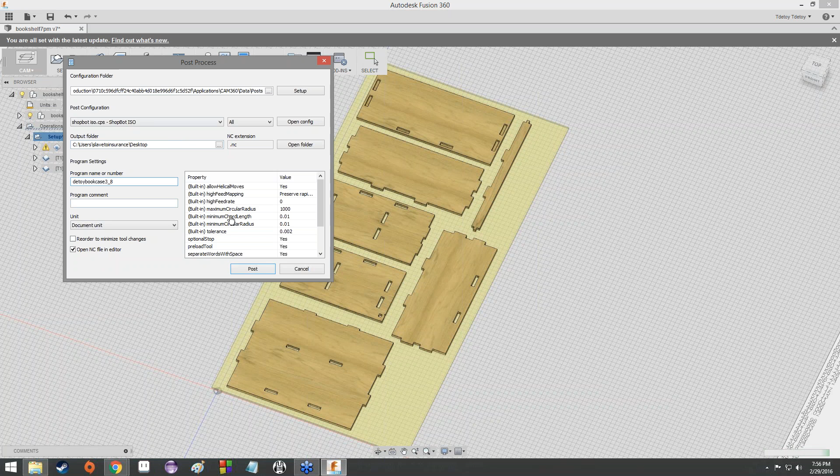And it's going to ask us, again, to save it. We're going to hit save. And it's going to beep boop for a little while. The computer's going to think about stuff. And it's going to open up in Brackets, which is basically a program that came with Autodesk Fusion 360 so that you could look at G-code.

And here's our completed G-code. This is just basically a set of coordinates that the CNC machine moves to. So it's like start here, go here, go here, go here, go here, go here, blah, blah, blah each time. And it was a whole lot of cuts because it's going to go in a lot of different directions.

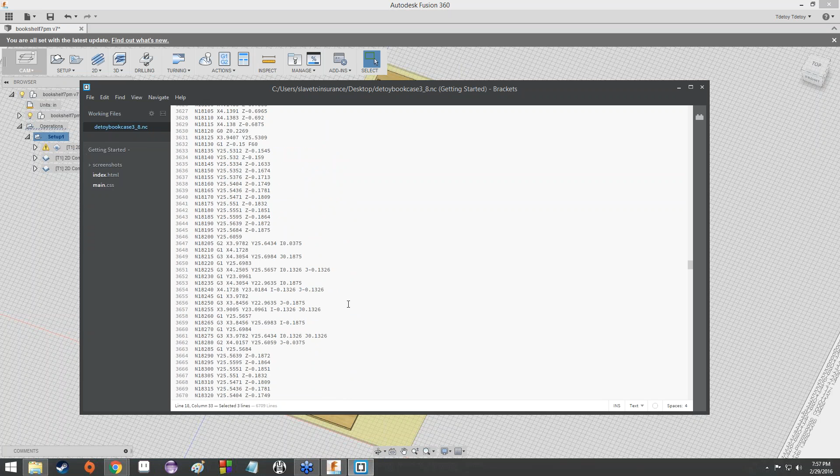And it's got to be very specific about it, in case you want to make like a circle or something like that. That's where the granularity thing exists. That basically how circular do you want to make a circle kind of option, the tolerance, is because it has to calculate a coordinate for the tool to move to for each point. And as you make it more circular, you add more points.

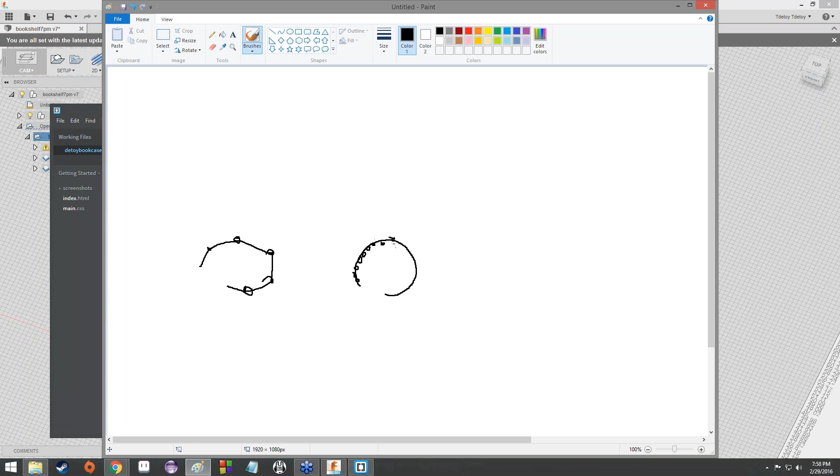So, something like that, it has to move in a straight line to each of these points. That's going to be far fewer different commands than something like this, which will maybe have this many points. You get the idea. I'm not going to draw them all.

That's where a lot of times the speed can come in too, because it has to load all these instructions as it's doing them, and they're not exactly memory-intensive instructions, but whatever. Your computer has to make the instructions too, which can increase the amount of time it takes for your computer to translate this into G-code, so on and so forth.

So that's perfect. Now you've got your entire bookcase exported into G-code. Now all you need to do is find a piece of wood that has the exact same dimensions and a CNC machine with a 3/8 inch cutter, and you can put it onto a USB thumb drive, plug it into the CNC machine, assuming it's a ShopBot, and then just have it go. And then before long, you'll have a bookcase. Really and truly.

So actually, that does it for CNC and Fusion 360. Pretty much a cool month and a half after we started. It was a long lesson, but I thought it was pretty cool. I don't know about you guys, but I thought it was pretty neato.